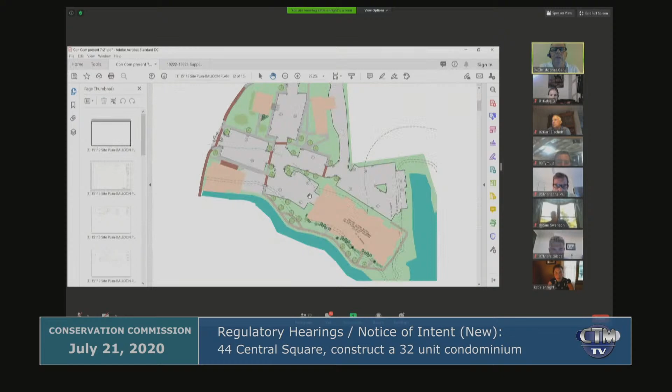So the remainder of the paved site, which is under the project here, essentially flows right to the brook and to the wetland. There's no curbs in these areas. The water just flows off to the vegetation along the edge of Beaver Brook and along the little bit of vegetation that's between the parking area and the wetlands to the rear of the site.

The proposal is to essentially take out and redo all of the existing pavement, remove any excess pavement, and construct this new structure at the back of the parking lot. So this structure actually entirely fits within a paved area that currently exists, and the paved area actually goes out further and closer to the wetlands on all sides. The project is to essentially redo the pavement throughout the area to fit this project.

You can see we've relocated—this is the 200-foot outer riparian line here. We've looked to try to relocate a lot of pavement up between the Santander and Fisk House. What that does is it brings some of the pavement away from the edge of the river and provides parking for the Fisk House renovation.

We've also provided additional parking adjacent to Santander. By doing that, there's an outbuilding here which we're not showing on this plan. We had originally looked to demolish that, but we're actually going to save the original portion of that building and move it into this area here. So that outbuilding is actually going to move to this location in the future plans that you see.

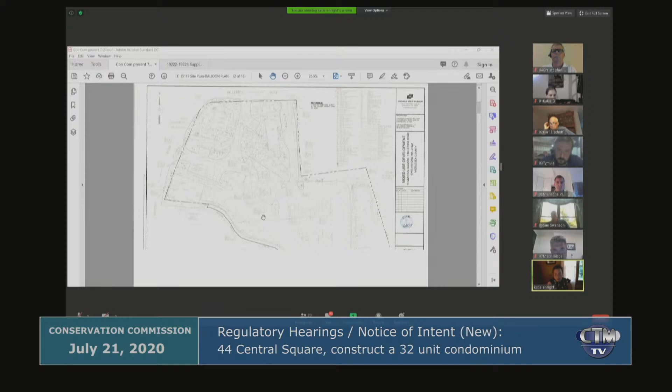We had a tiny little area on the grist mill that ended up being within the floodplain. Certainly this site is much more significant to the work that we're doing within the floodplain.

So you can see this has been color coded. Green areas are cut and red areas are fill, which I think is pretty helpful. Our cut fill analysis is on the side here, and we were very cognizant to make sure that our cuts were greater than our fills, so we're actually providing additional flood storage on the site.

Excuse me, Katie. What was the color coding again? Green is what and red is what? Green is cut and red is fill.

So this is helpful to determine where we set the building at an elevation that's just slightly higher than this side of the site. We wanted to keep it really low so that the area within the footprint of the building and the garage is considered flood storage. The floodwaters will rise within the building and stay there and provide the flood storage to mimic what was there today.

So you can see in this bottom column here, our area of cut, our area of fill, and our gross cut and fill, and we're in cuts everywhere. That's good for the floodplain because that means we're providing more floodplain storage between each of these elevations. We've studied from 121 to 122 at 1 foot intervals per the regulations to show that we meet the standard in that area.

Let me go back to the colored plan because it's easier for you all to see. We've also looked at, under the redevelopment standards, we have to make sure that the site is going to be better in the post-development condition. Besides the fact that we have eliminated about 1,200 square feet of impervious on the site from pre to post-development condition...

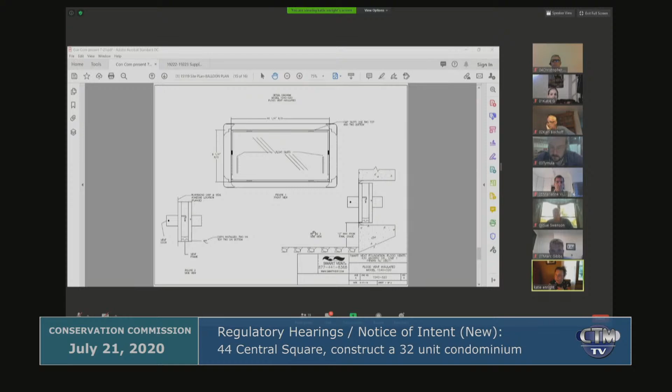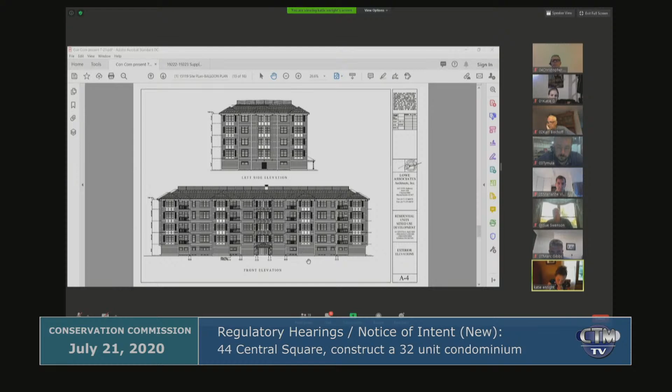We do have some initial comments from, I'm going to go back to colored plans so we can look at that. We do have some detailed comments from the Department of Public Works. We also have some comments certainly from the different departments and the planning board. So we do anticipate revision as we work through. And I know we don't have any technical comments yet from DEP, although we did see a file number pop up this week on their website.

So they've received everything. We're here tonight to get certainly your initial comments and your initial views. We know that there is most definitely a revision coming. We'd like to capture as many comments from all of the boards, committees, and commissions that we're seeing to make our package as representative of all boards, committees, and commissions as we move forward. So I'm looking forward tonight to hearing any comments, questions that we can certainly work on in the coming weeks. With that, I will turn it back over to you.

Thank you very much, Katie, for your presentation. We appreciate that. And again, for members of the public, what we're going to do next is we'll turn to our commissioners. We'll give our commissioners an opportunity to ask questions, make comments, and then we will go to the public as well after the commissioners ask their questions for public questions and comments. But as Katie Enright, the civil engineer, stated, it appears that this will be the preliminary meeting tonight. Most likely we'll have a continuation to another night for further follow-up meetings. But let me now turn to our commissioners and see if they have questions or comments at this point.

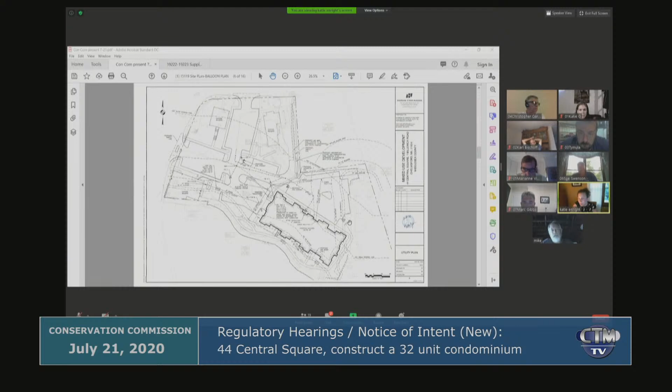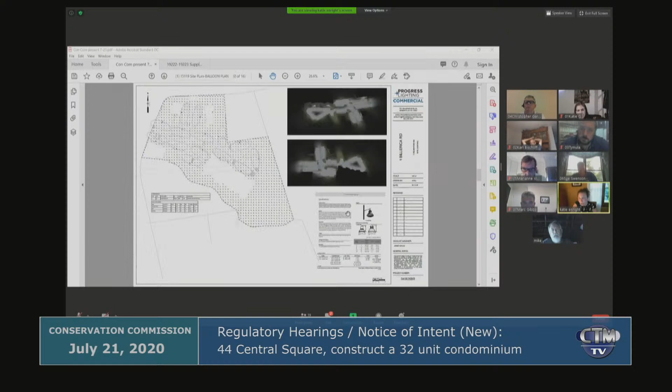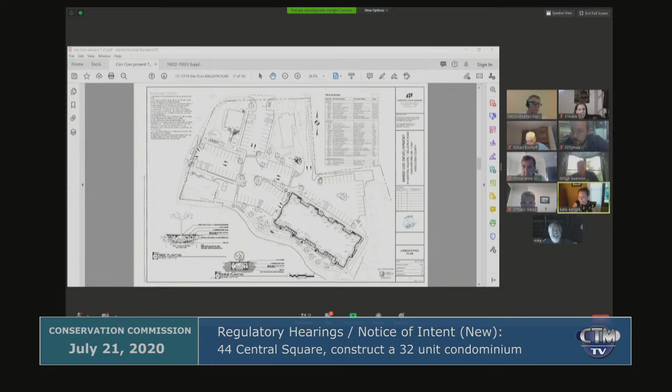And one of the things we're going to be doing, Mike, is upgrading the landscape plan in the coming meetings. We didn't do it for this evening, I'm waiting to get some comments from the planning board member that likes landscaping and comments on it a lot. That's fair. So I'm waiting for those comments, but we will be providing additional vegetation in this corner. Okay, so as an abutter, that's one of my major concerns is shielding from the new building. So if you're going to take down existing trees, I'd like to see them replaced with something at least as tall as what's there now.

I had a question during your presentation, and maybe you've already answered it. Will the water, if there's flood water in the garage, be treated before it gets discharged to the river or the wetlands? Is it just going to go through the swales like anything else would?

No, what's going to happen is the floodwaters will actually flow through the garage and just continue along, passing through the vegetation. Well, if this area was inundated with water, the vegetation will also be underwater.

But so the swales aren't actually built up relative to the base of the garage? No, basically they're for the everyday storm event. So that takes care of the stormwater event when this area of the lot isn't overcome with floodwaters. This area will be treated prior to entering the resource areas.

And would you expect the stuff that exits the north side of the building to go into the catch basin? No, because this whole area will go to this swale, and this whole area will go to this swale. The rest of the site here will go to the catch basins.

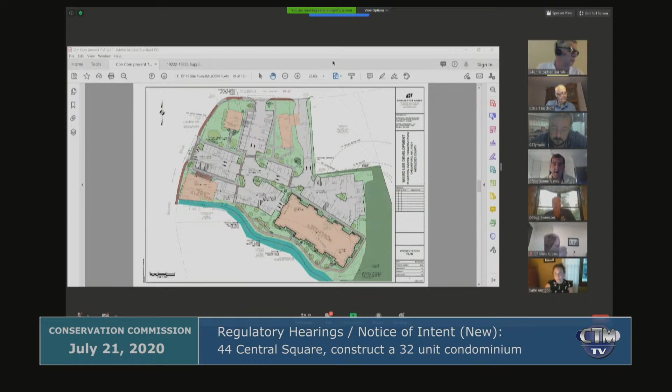So we're all set, we have a site walk scheduled and we're continuing the meeting. We have a site walk Monday at 6 o'clock, excuse me, yeah, 6 o'clock. And then we're coming back on August 4th.